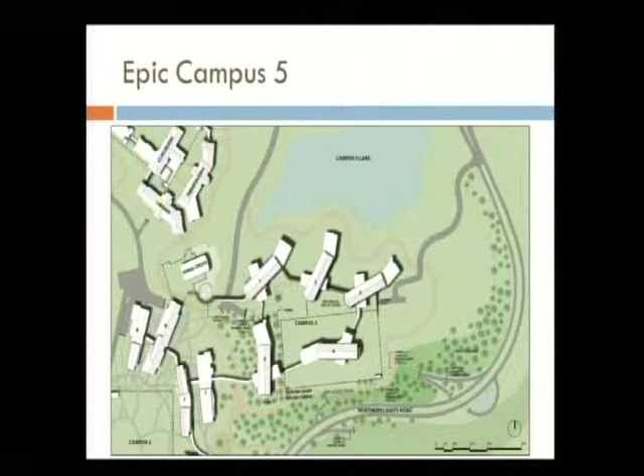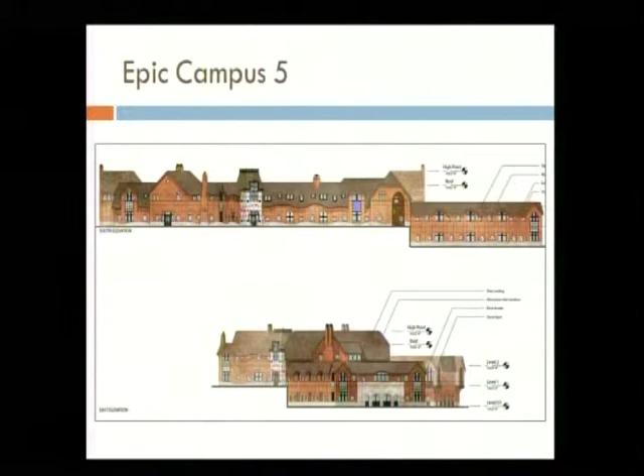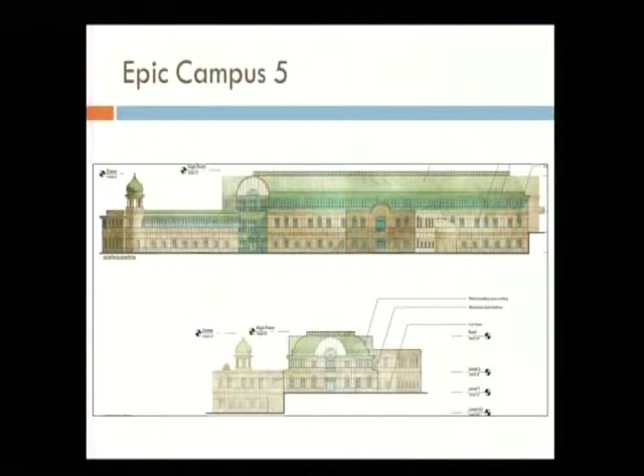Architecturally, each building has a different look and design to it. Similar to the other buildings on Epic's campus, all buildings would be high quality architecture, with lots of use of stone and glass, some with slate roofs and brick, very similar to what you've seen before - high quality construction.

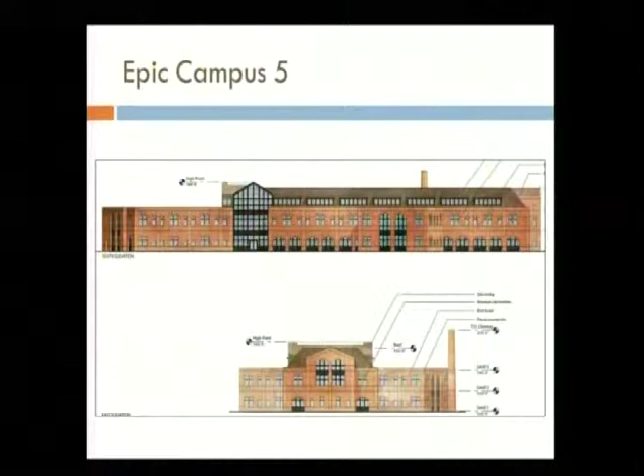Staff has taken a look at it initially and we have no concerns with it. As I said previously, the heights on a few of these buildings would require a conditional use permit, similar to what we did for Campus 4. The building heights, though, are actually smaller than Campus 4, ranging from about 50 to 60 feet in that area. Precise designs are still being finalized, but they would not be as tall as Campus 4.

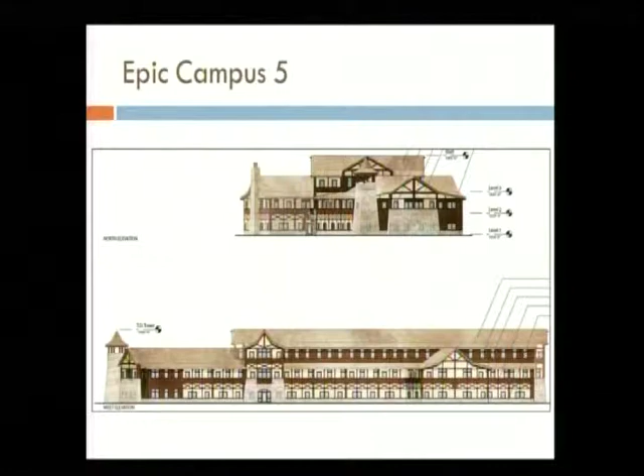So tonight, staff recommends the Plan Commission review the submitted materials and provide feedback to the applicant. I know Bruce Richards and some EPIC staff are here if they're happy to answer any questions that you might have. Thank you, Mr. Sayre.

Are there any representatives from EPIC that wish to add anything? Otherwise, we'll open up for questions.

And if you would, we know who you are, but would you introduce yourself, please? Bruce Richards from EPIC, 1979 Milky Way.

Just one point I wanted to point out. I know that 60 feet was what you were looking at, but that 60 feet is viewed from the ground on the lake side. On the road side of the buildings, we're looking at 45 feet for the height of the building. So I just wanted to point that out. And again, I'm here for any other questions you have.

It's just a standard garage door, I believe, some type of metal garage door, so that would roll up and roll down. So I think that's for any type of box truck or trailer, they would load it through there.

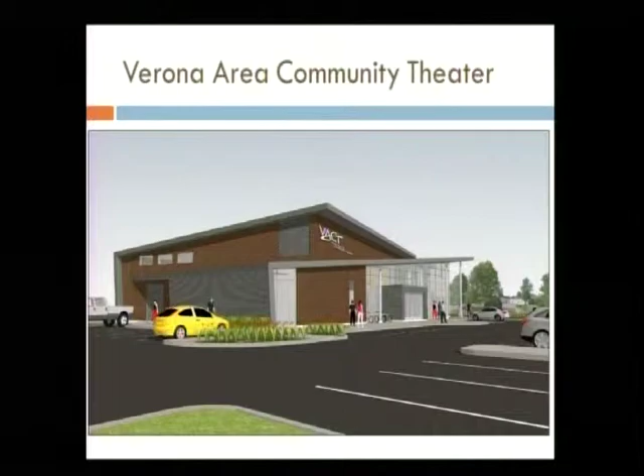Yeah, I was more asking if you looked at an elevation change to make it easier to get things in and out of trucks.

Yeah, my name is Mark Shelfeffer with Case 4 Architecture. We didn't look at that for some respects, because when they're building the scenes, the ability to actually back that truck into the assembly shop space is a benefit to them.

They can get things closer to the stage before they have to actually pick things up and move them around. So that's one, and I think just the size and the layout of the site makes it very difficult to get something like a dock in there.

Great. No, compliments. The design's come a long way, and it's looking great, and best of luck with the tough work.

Thank you, Mr. Lytle. Other questions, other comments? Mr. Linder? I like the old one better. No, just kidding. Yeah, I think it looks very nice. Do you guys think about using two-tone brick or two different colors of brick, mainly on the Lincoln Street side, to break it up at all?

I'm Paul Cuda with Case 4 Architecture.

I think it's a relatively small building, so our thought is the brick we're looking at has some color and character to it. It has an iron spot, so even though it's kind of brown and red, it has some purples in it, something to draw off a little bit with the gray. We wanted to keep it relatively simple, so we're suggesting one color of brick, just because it's not real large and we want it to be a simple, elegant look. It's really more about the pre-function feature space up in front, that lantern or beacon that draws you down Lincoln Street to the facility. So that's really where we've gone.

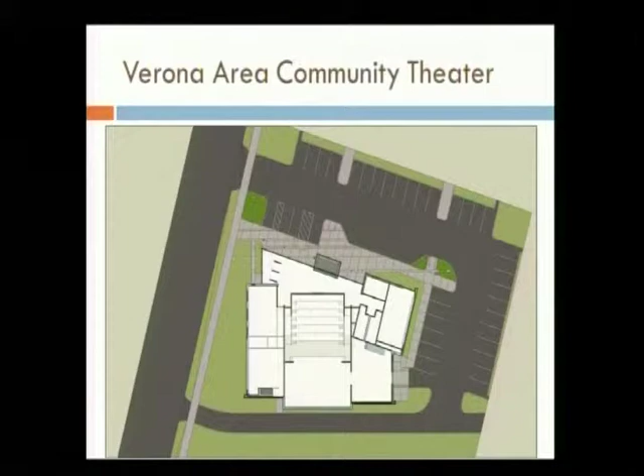Okay, so when you bring the next plan, show the signage on the plan. And that's something we just discussed today, so that wasn't included yet. Great.

Other questions, other comments? I'll just echo again - I really like the looks of the building, the entranceway, the front side, the north side of the building a lot. I'm very excited about the project. It's good for VACT, it's good for the community, and this is another perfect example of a really good public-private partnership, and that excites me very much. So we look forward to continuing to work with you.

Okay, no more questions on that. We'll move to agenda item number 6, which is initial site plan review to allow for the construction of a 17,447 square foot commercial office building to be located at Lot 11 of Liberty Business Park. Mr. Sayer, if you would provide the background, please.

Thank you. This is an initial review for a mixed-use building. This building will be very similar to the one that is currently on the opposite corner to the east.

Just to recap for people that aren't aware, this is Liberty Business Park. The city so far has approved 4 buildings in Liberty Business Park. Flex 1 is currently almost completed, right about there. I think they've taken some occupancy in there. Flex building number 2 is currently under construction.

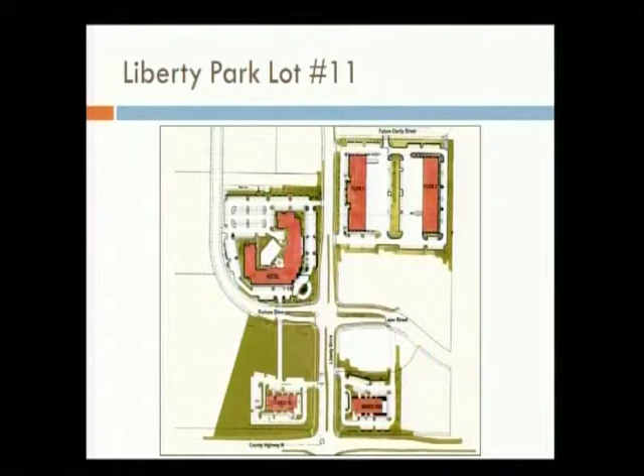From a bulk standpoint, it does meet all the required setbacks. We did take a look at the current right-of-way setback, and there's also a future right-of-way expansion plan for Liberty Drive. The road was constructed currently to the smaller right-of-way. There is an additional 12 feet that could be added in the future if traffic gets to the point of needing that. So on the site plan, you see two different lines, and that's where that's coming from. You have the existing right-of-way here, and then you have the future right-of-way in this approximate area.

The building itself would have a drive-through on the west side, and similar to the building on the other side of the road, it would have parking wrapping the entire site.

The applicant is proposing 80 parking spaces. Parking is calculated on a use-by-use basis, so it's impossible at this time for us to calculate the exact parking demand. At a minimum, it would require 59 parking spaces, so currently it appears to be appropriately parked. If parking ever did become an issue, there's additional development planned north and west of the site as well. It's something we could take a look at when users are brought forward for this project.

Access to the site is being proposed from Fortune Drive and from Liberty Drive. The access from Liberty Drive will require a plat amendment. The access was restricted on the plat for this project when it was platted many years ago. That's something that had been reviewed by the Plan Commission and Council for approval.

One item to note from a staff level that I'd recommend is that the applicant consider an additional pedestrian connection, especially down this driveway that's being extended from the hotel to the north, to the actual site itself. I know there's a sidewalk going to the property, but I just envision that driveway being used by people at the hotel, probably before or after dinner. It's the shortest route, so I would encourage the applicant to consider either a temporary sidewalk or path there, or as the site develops to the north, take some extra consideration to that as well. How we're going to get those people through there.

The hotel has approximately 231 rooms. That's a lot of people, especially since there's a drive-through here, so it's probably a restaurant going in. I would encourage the applicant to give some special consideration to that, because I would anticipate a lot of people probably walking to this property.

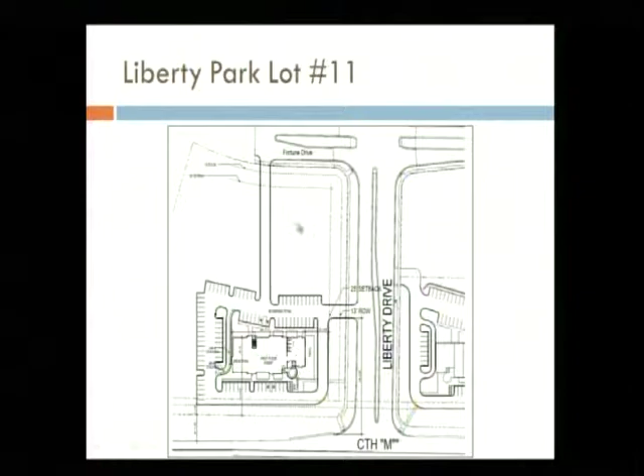Drainage and stormwater, that's something we'll review at the next step. At this time, staff has no concerns with it at the moment because the rest of the site is vacant, so there is space to accommodate stormwater.

The building itself will be kind of the mirror of the twin to the east. It'll have that Italian type theme to it—EIFS, stone, brick materials, and a synthetic tile type roof as well. The design is very consistent with the building to the east and also the hotel, carrying that Italian theme the applicant's been going for. Staff has no concerns with materials at this time; it's very similar to the building to the east, so we have no concerns with it.

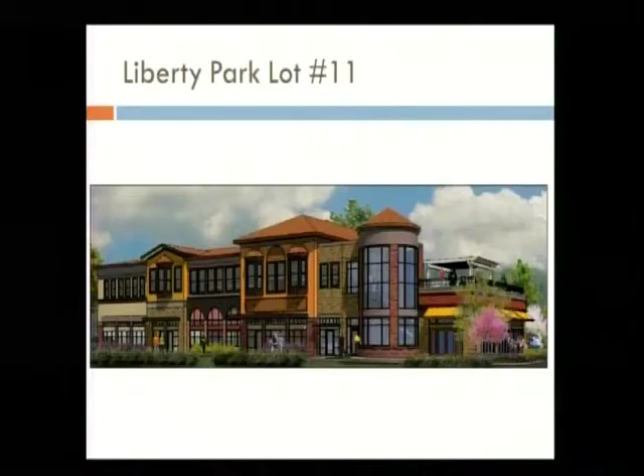With that being said, staff does recommend the Plan Commission review the submitted materials and provide feedback to the applicant. The applicant is here tonight along with the architect, and I'm sure they'd be happy to answer any questions you have.

Is there anyone representing the applicant that wishes to speak or answer questions? We're both here for questions. Okay, questions or comments from Planning Commission members?

Mr. Horsfall: Is there, for the lot size, a minimum building size? Because you look at the picture on the front page and it just looks like a small building on a large lot. Are you proposing to put more buildings on that one lot? It looks out of place, or size-wise out of place, if you know what I'm getting at.

Are you referring to the large green color run through? Yeah. That's just for presentation purposes. Similar to this one over here, there's potential for another building on this corner location, and the rest will be developed as the site develops in that direction. Okay, so our plan is there will be another building just like here on this corner. Okay, thank you.

Other questions, other comments? Mr. Linder: How about bike parking there—how would bike traffic get around? Is there a way through Liberty Drive to get through, or how would bike traffic get there? I think the bike traffic, similar to the other one, would end up coming down Liberty Drive, then down to Fortune, almost like an auto would. I don't believe there are any separate bicycle trails incorporated into this project at this time.